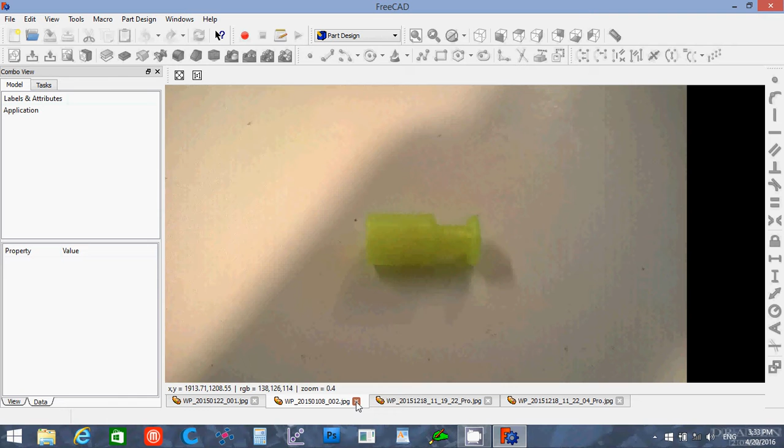This is another product I made. It's a coffee creamer caddy design. It has 4 pieces: one long threaded shaft, and the other 3 pieces have matching threads in the holes so that it can be screwed together.

In this case, again, like I said, I started out with something I already tried out, just a small portion, and then designed out from there.

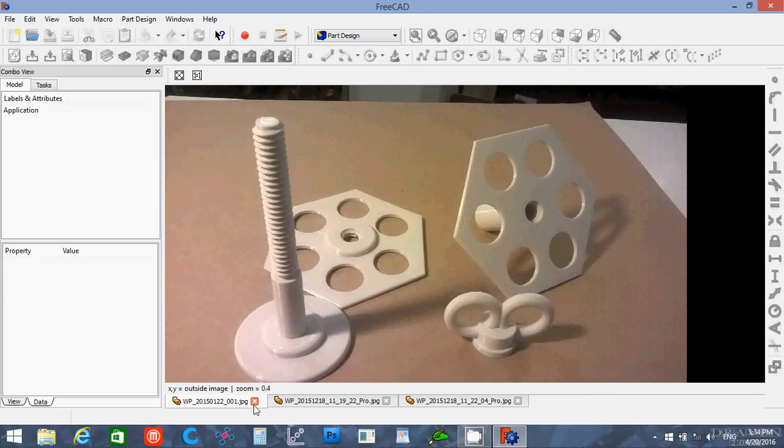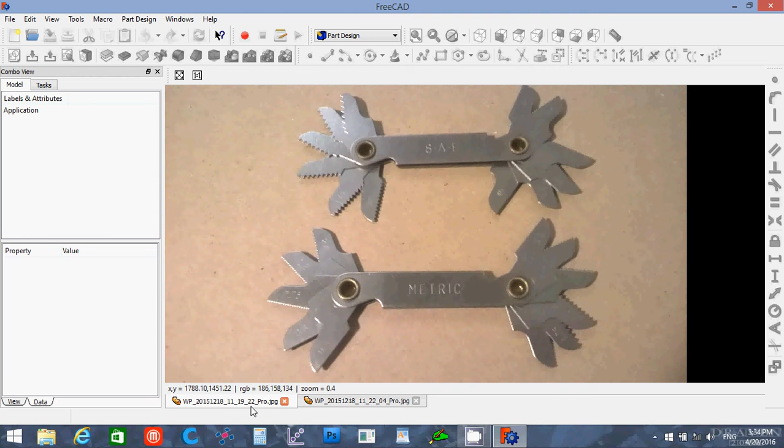Now, if you're trying to do up a 3D print that has to match some other threads that were already tapped into something else, or you're trying to match exactly to some other mechanical part, I would definitely suggest trying to get a couple of tap and die sets. These are the gauges that they use. These gauges will help you determine what pitch to have the threads at, and basically they can be placed onto a bolt to figure out what their threads are.

Now, because I'm mostly using metric, I use the metric nut and bolt one for this example. But once you have this, like that one, the pitch is 1.0 millimeters. Thus, that can be the pitch used to create the threads, or the part to try to fit the threads.

Now, I have actually done this on a project for a lady who came into the Arcade Libraries design spot. That's part of the Sacramento Public Library's Library of Things program. Me and one of the volunteers there worked on her project, which was basically a leveling foot for her sewing machine table. So we started out by using the metric gauge here to measure her broken plastic part, and we were able to replicate it based on these numbers.

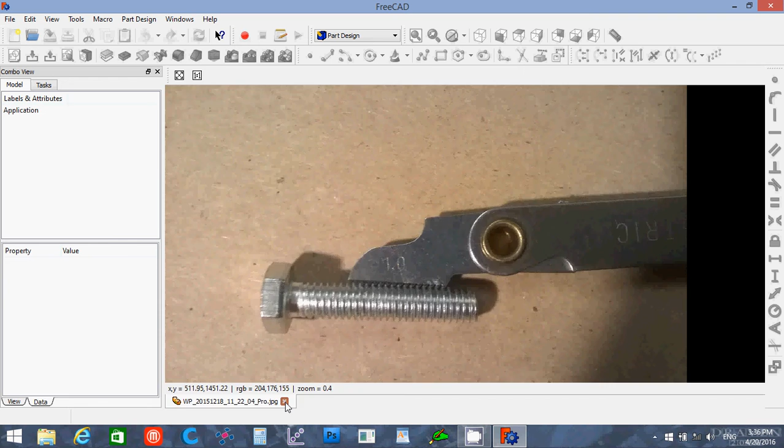We're in part design. So I'm just going to switch over to part, and then I'm going to create a new document. And under the other primitives, if you click in here, you want the helix.

I'm going to make it, for our example, a pretty wide pitch - I'll say 3 millimeters. I'm going to make this about 20 millimeters high and a radius of 5. And say create. Notice here there is right-handed, and if you wanted left-handed, so you can make right and left-handed threads. I'll go create, and I'll close it.

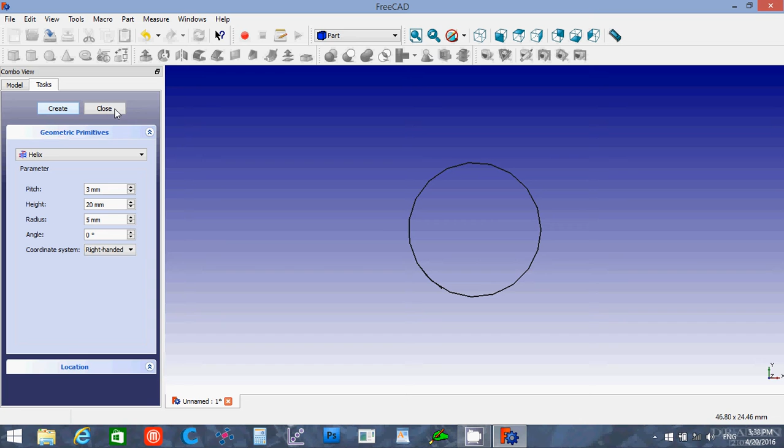And then I'm going to change this to front view so you can see. Now the helix is just a 2-dimensional object. It created this basic pattern we'll use as the thread pattern for our object.

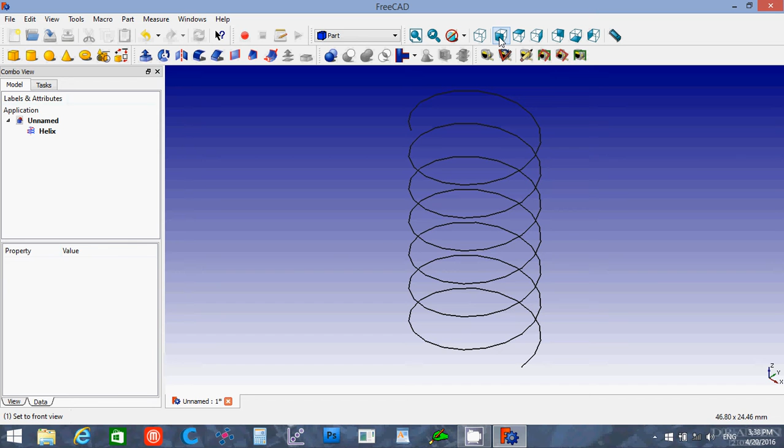Now I'm going to switch over to side view. You can see how it turns and spins around. And then I'm going to go back over to part design.

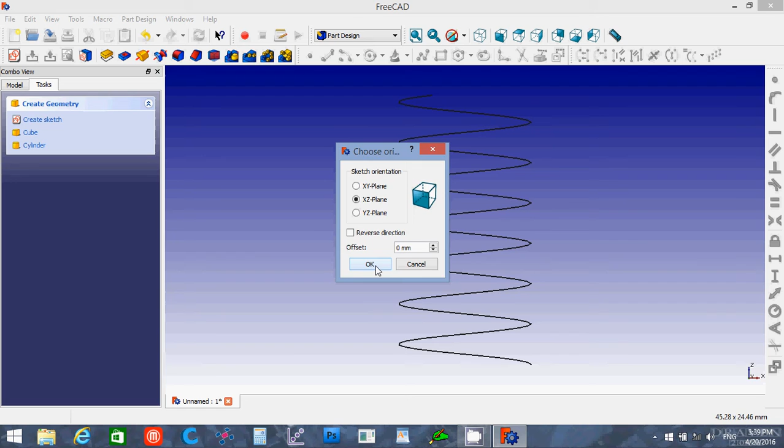And I'm going to create a sketch, and we want the XZ plane right now. Say OK. And we want to zoom in because we're going to want to look at the edge here.

Now, you don't want to make the profile of the thread exactly the same height as the helix from one point to the next. It should be just slightly smaller. And the profiles are basically what you create threads with.

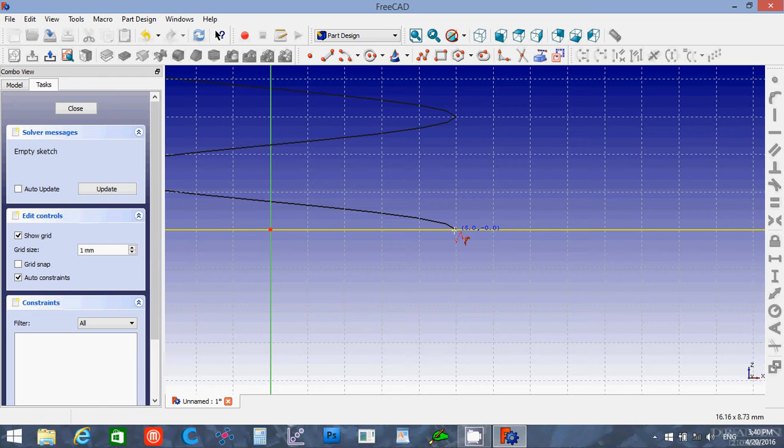Now you do want to make sure you're touching the edge of the helix there, and like I said, just slightly smaller. Now you can have all sorts of different lengths of profiles of threads. I suggest not going further than the same as the height, but I'm going to go slightly smaller and just make it 2.

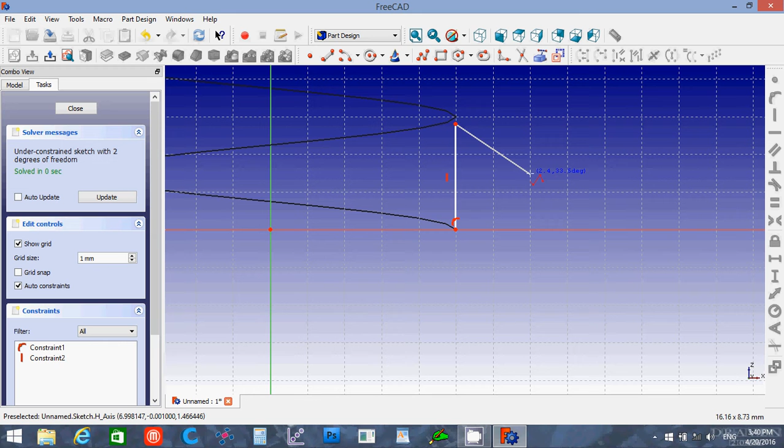And now this is the most typical style you're going to probably find, as far as it being a triangle.

But you can also have ones that are rounded. You can have ones that, I think the Acme threads, they come out and they're square at the top and then they come back. So you can find all sorts of different profiles for the threads. If you're designing for other things, you'll want to measure and try to figure out whether it's a rounded one and how much to make it round, or if it's more like the Acme.

It's like some of your water bottles or juice bottles, they'll use a more square, squared off tip to the thread. Some of them also use that more rounded looking thread.

Like I said, you don't really want to touch the next line. That will cause issues when the thread is made. I'm going to go ahead and click close.

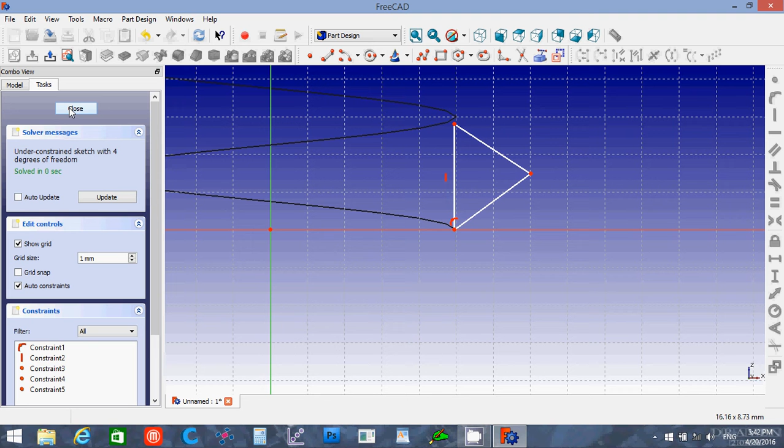And then we're going to go back over to part. Maybe I'll zoom out. Back over to part. And then what we're going to do is we're going to sweep the sketch around the helix.

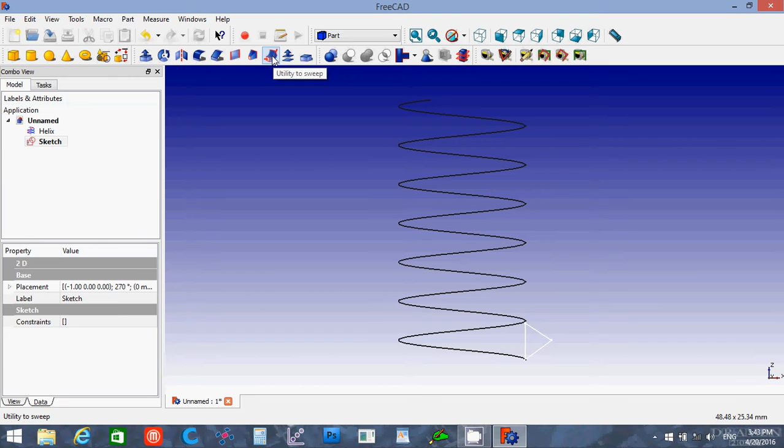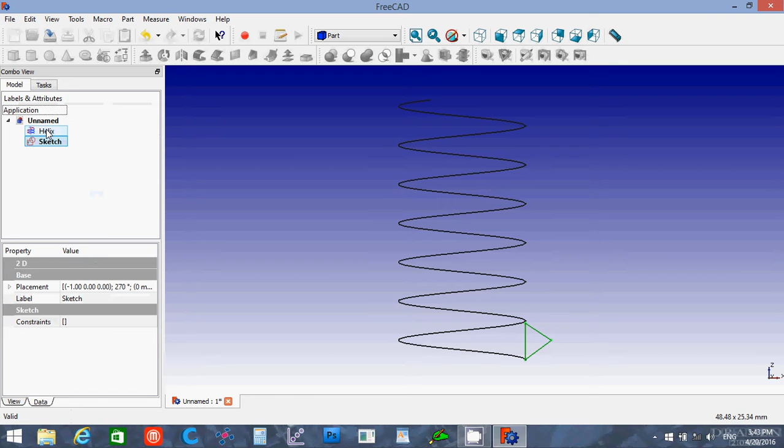So we're going to click the sketch, and put it on the other side. Go create solid, Frenet - I hope that's how it's pronounced. Now what I do is I go back over to the model, I click the helix to select it, and I go back over to tasks and say OK. And there you've just generated your threads.

Now if you want to, you can hide the sketch. Now select it, press space bar, select the helix, press space bar.

Now if you want to try to make semi-matching threads, I click the helix, go control C, control V, bring it back up so you can see it, but we're going to change the radius, and I'm going to go out 2 millimeters, and then I'm going to take and change the placement of it slightly.

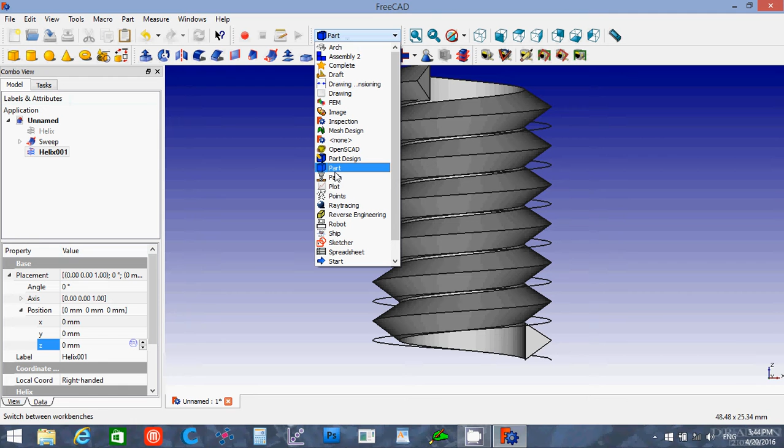Now the tricky part with this, we're going to switch back over to part design, create a sketch, XZ plane. Okay, zoom in.

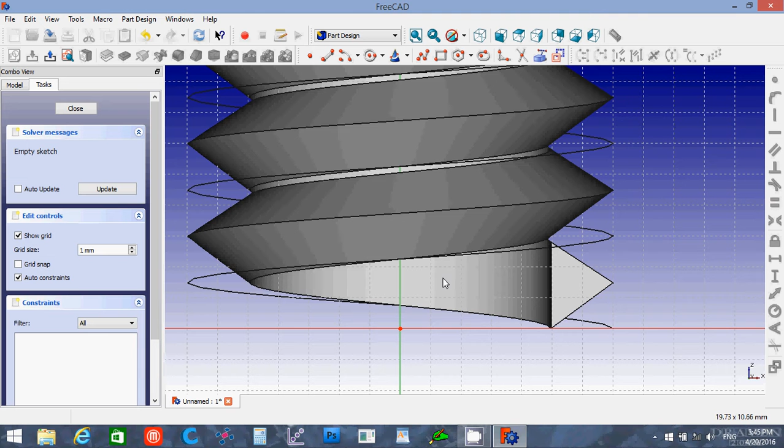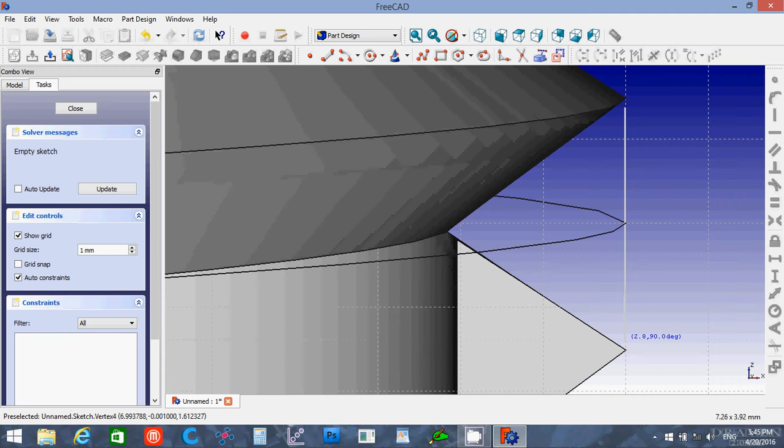The tricky part here is to make a triangle that is slightly smaller than the other triangle that we just made. A little more. And as long as the triangle touches this edge here, we're good. So you want to make it slightly smaller than the other triangle.

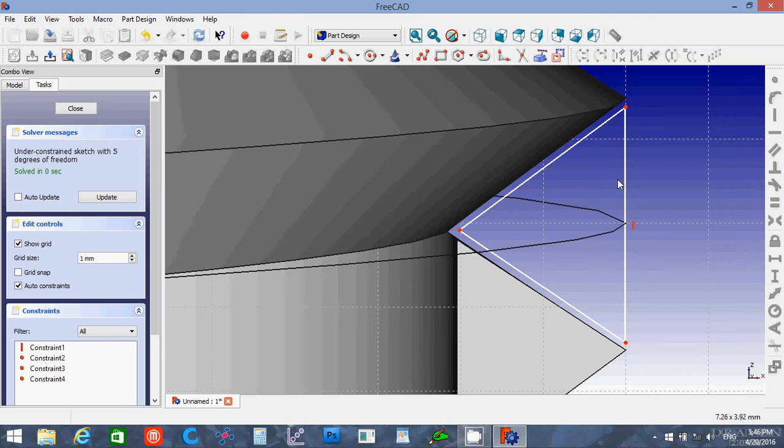So what we're doing is we're trying to create a matching thread for the hole of whatever this is threading into. So close that. Zoom back out.

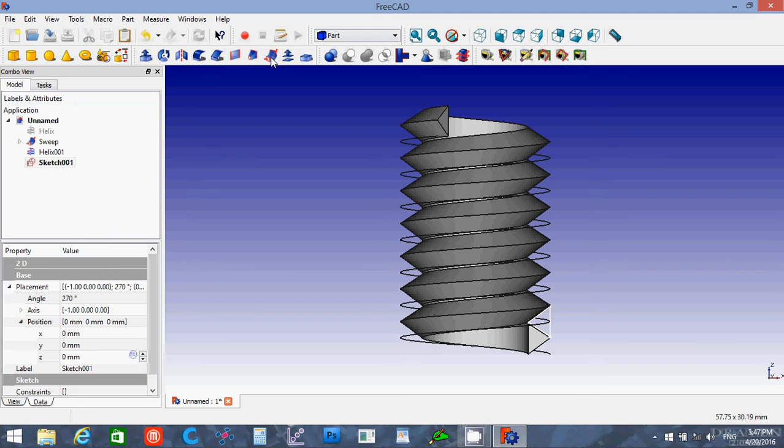And we're going to do another one of those sweeps. We're going to go back over to part, we're going to take and sweep. This time we're going to take the new sketch, create solid, Frenet, go over to model, click the other helix we just created. That will select all helix, and say OK. Now you've got two hopefully matching sets of threads, and we're going to create a cylinder.

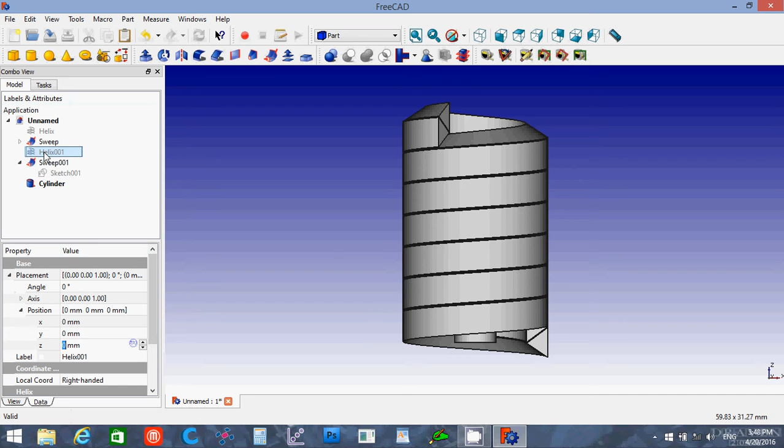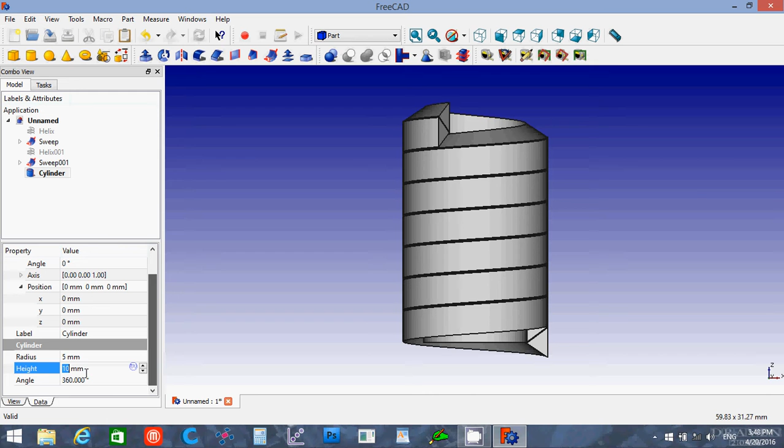Go back in and hide the sketch and helix. I sometimes wish it would automatically do that for me when I create different things, but it should already know that I don't want to see what was originally in there. And I'm going to make the cylinder radius same as we made the original, and then we're going to make this 20, let's say 25, and bring it down.

Want the top to be even with the last bit of thread. Now we go to 2.25 down.

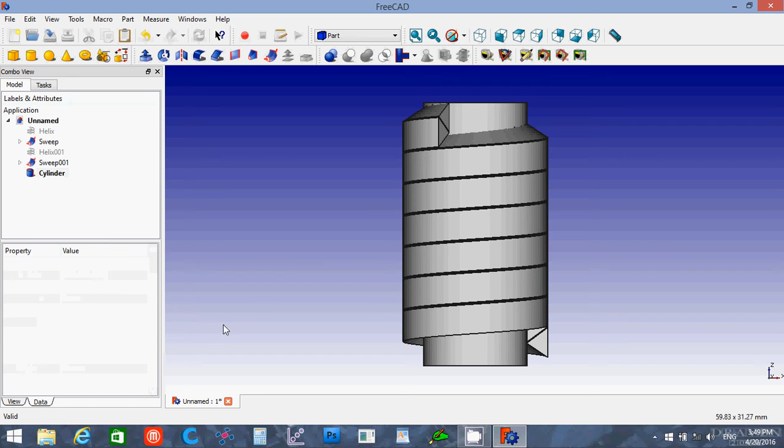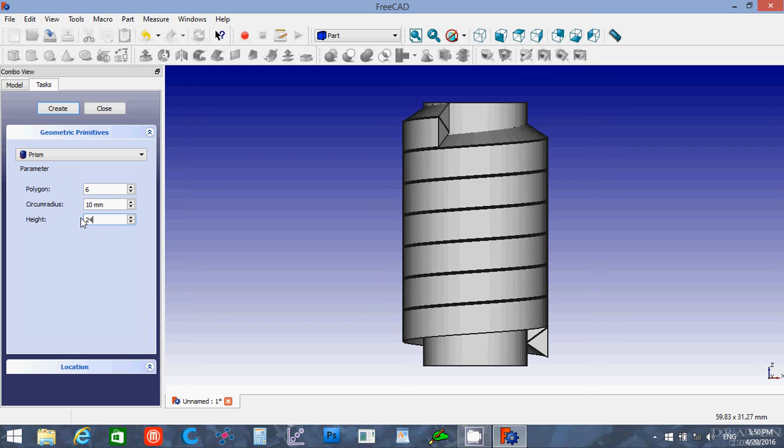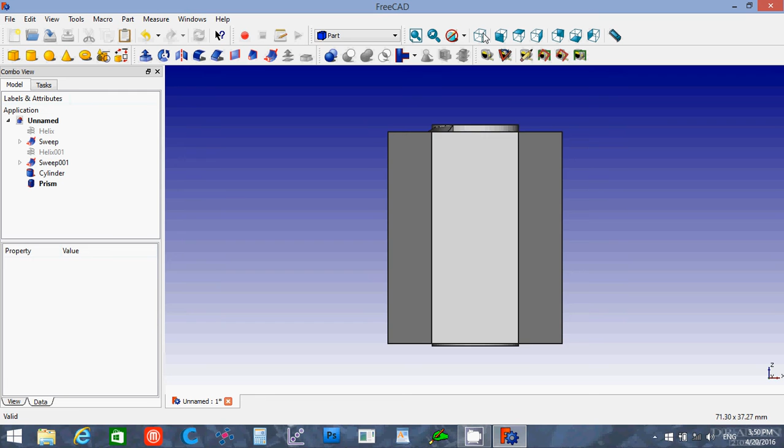And what we're going to do is we're going to make another cylinder. I'm just going to copy the original first cylinder, so Control C, Control V. I'm going to drop that one down to -5, and then I'm going to make it taller, say 30. And then I'm going to make that one the 7. Now this should match the second outer set of threads that we created.

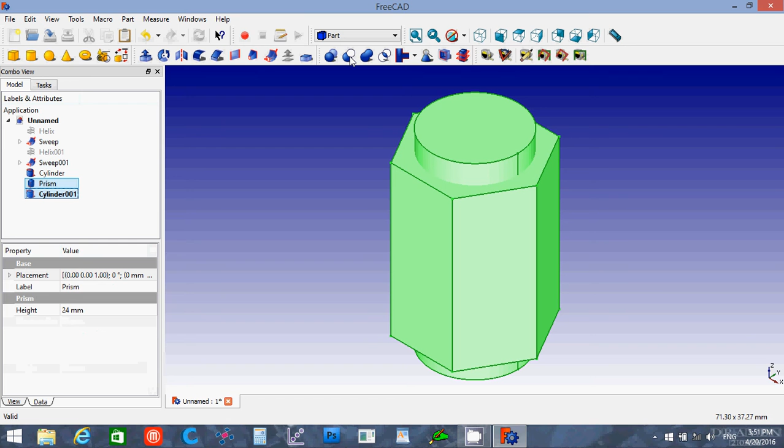And so I'm going to take the prism, and I'm going to control, click that cylinder, and I'm going to make a cut. Okay.

Now, you may be wondering, why didn't I just take the original threads and cut them directly from this prism? The issue with trying to do that is that it will be way too tight. If you attempt to put the threads together that way without making any gap between them, you won't be able to thread the parts together.

When it's 3D printed, and just because of the variations of how we're making 3D prints and the plastic and how it extrudes, etc., if you don't add any gap in there, you're going to end up with two parts that just will not come together.

You may have to play with those triangles a little bit to get the tolerance to work well enough when you actually print the thing on your 3D printer. There's a lot of things that can affect that, like what resolution you print at. The lower the resolution, the tighter the part might be. The higher the resolution, the more space you may need.

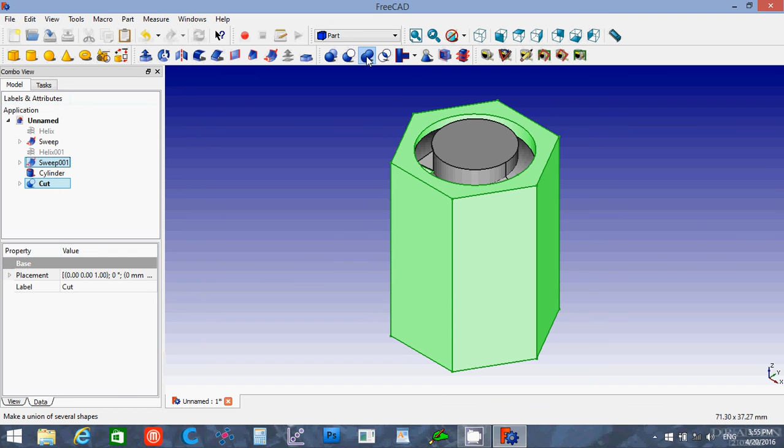So what I'm going to do is try to see whether or not we can combine the cut we just made with the second sweep. That may take a while because of what the thread's geometry is. Okay, and that succeeded.

So then we're going to do the same thing. Actually, I should probably give us some sort of surface for that middle.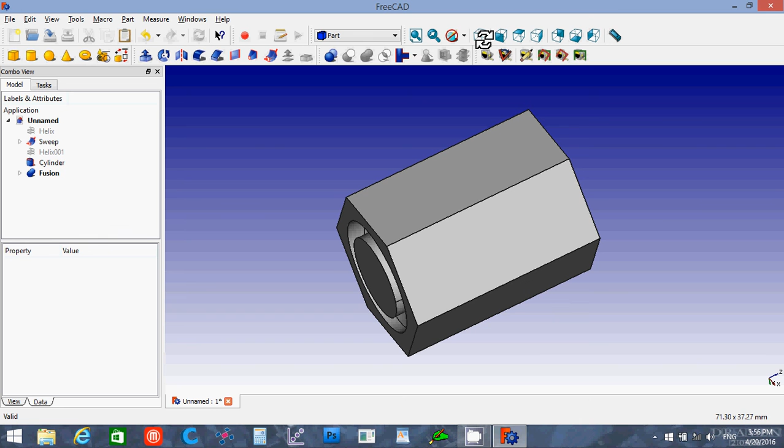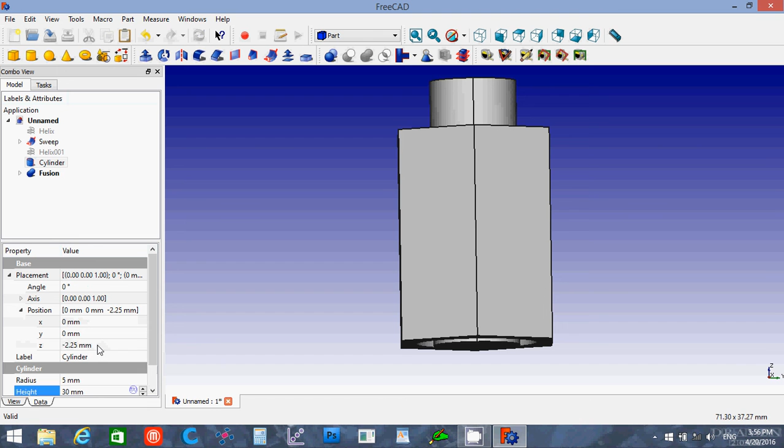I'm going to make the cylinder here a little longer. Let's make it 30 and then bring it down a bit. Make that a 7.

And then what I'm going to do is copy that, and then I'm going to make that one 4, and change the radius to 10 wide.

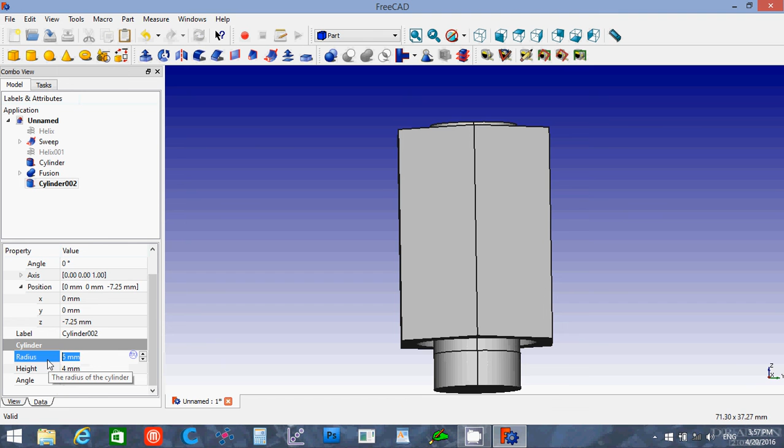What I'm going to do, it's going to seem funny, but I'm going to copy the cylinder in. Control C for copy, Control V for paste. And I'm going to change the radius to 1, and I'll leave the height where it's at. Then I'm going to move it on X - let's say it was 10.

Okay, I'm going to show you a quick way that we do this. We can use the array tool to make sort of a knurled knob, or a knob that's easy to turn.

So I'm going to go Part, Draft, and then I'm going to take that cylinder and go to array - this one here. Instead of ortho, you want to change it to polar. And then I'm going to say I want 10 of those. Enter.

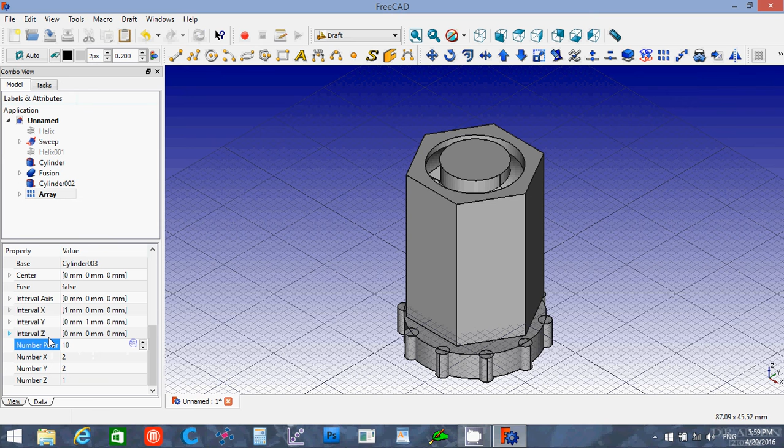And then I'm going to tell draft I don't want the grid. Return back over to Part. And then I'm going to take the cylinder, control click the array, and do a cut, so that we have little grip holes. So now I'm going to take the sweep, the cylinder, and the cut we just made.

And I'm going to fuse those together.

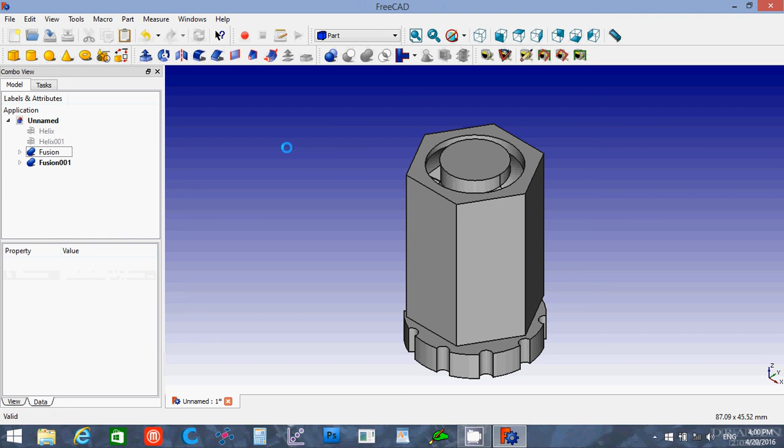Okay, and I'm going to rename these so that I know which is which. If you right click on it, or hit F2, you say rename, and this is going to be bolt. And then the other one, this is going to be nut.

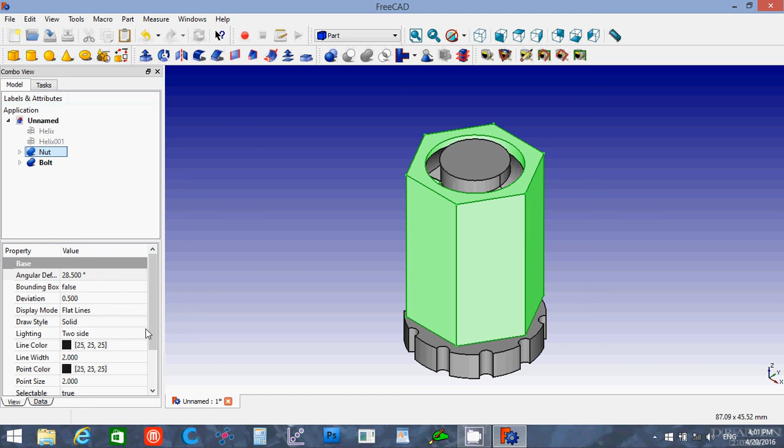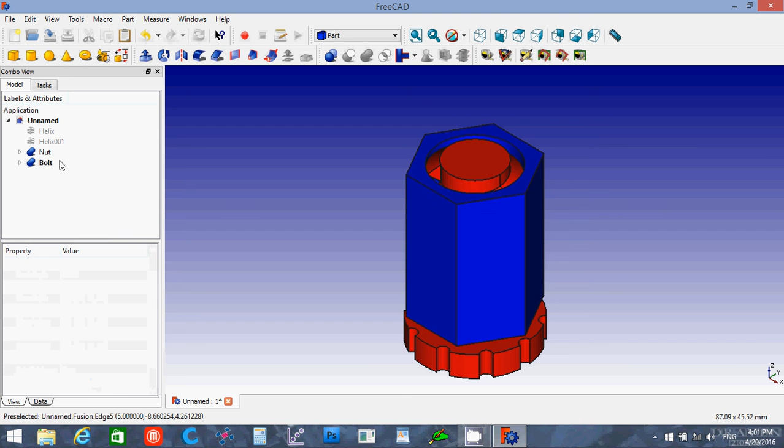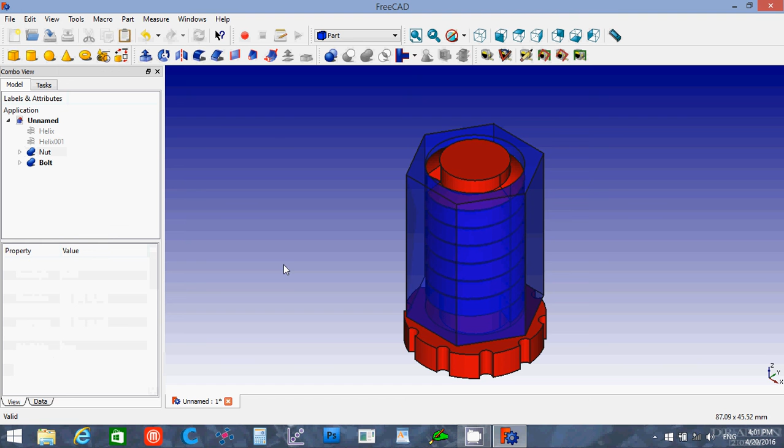If you want, you can change the colors of the parts too to help differentiate each one. And you can change their positions if you want, or if you really want to take a good look at the objects and how they overlap, change the transparency. I like to set it to 50, so that way you can look through it.

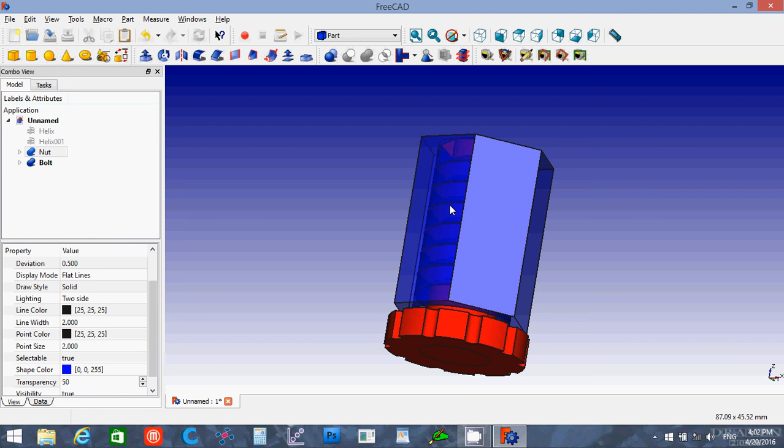Come on. I'm not sure if this is the computer just being really slow or if my mouse isn't clicking.

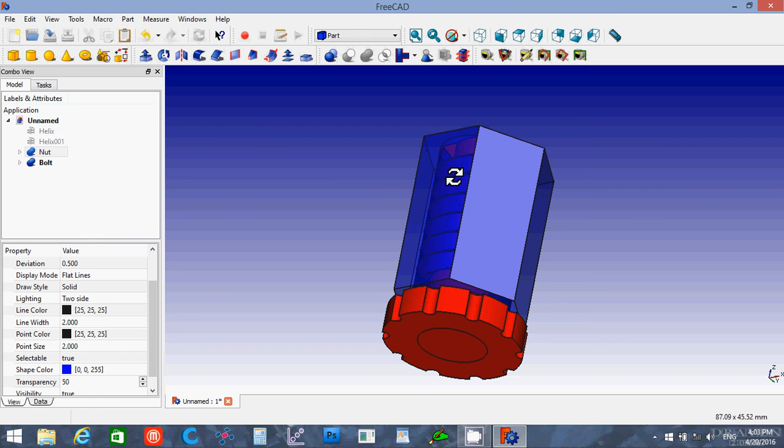Okay, so we can sit there. File, save. Just call this nut and bolt. And then select each part, probably put them out separately. Make sure your save type is STL mesh. Save.

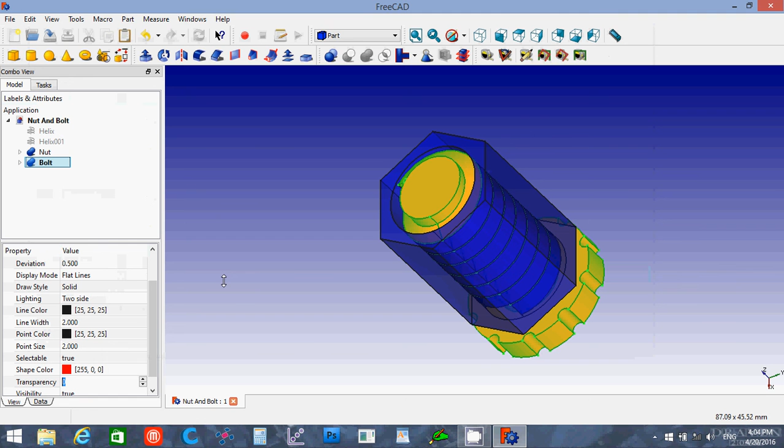File, Export. And we'll open up netfabb.

So far, all I've shown you is loading one part at a time. You can actually load both of them. Okay, and this shows no problem with it. Fun thing with this is it will put it just like I just had it - bolt, STL. And no problems with both of those, so they should be 3D printable.

Like I said, you may have to play around with the triangles to make it mesh completely right. I tried to have a certain amount of space in there, but there's no real super tight formula that will work for just about all 3D printers. It depends on your printer and what resolution you're printing at. Now, when I print this type of stuff, I definitely like to print at 0.1 millimeters to make the threads as tight as possible on my FDM printers.

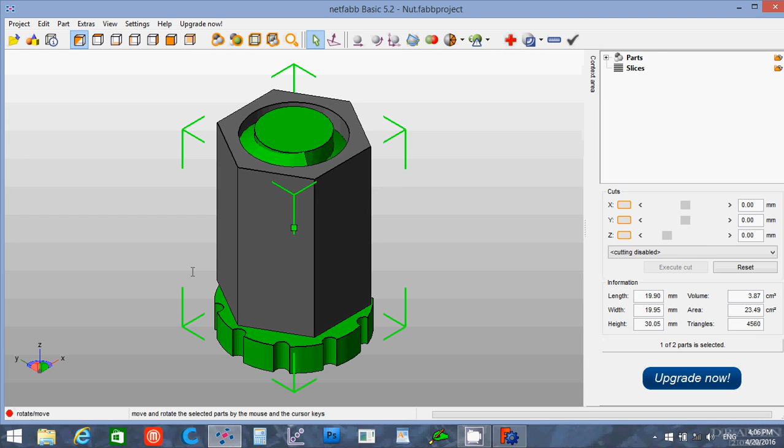So that's it for how to create a thread in FreeCAD 16. Thank you for watching.